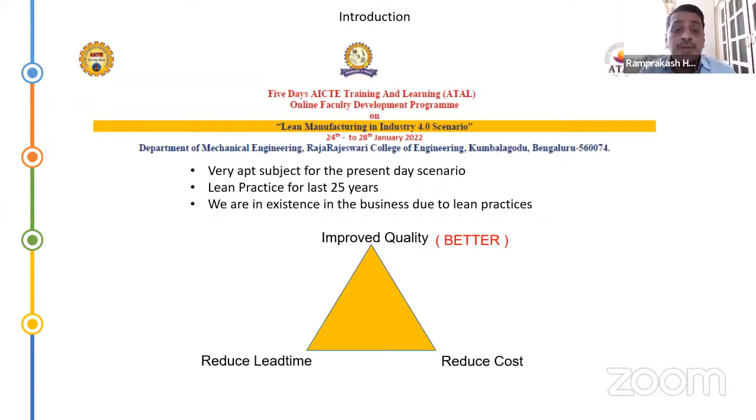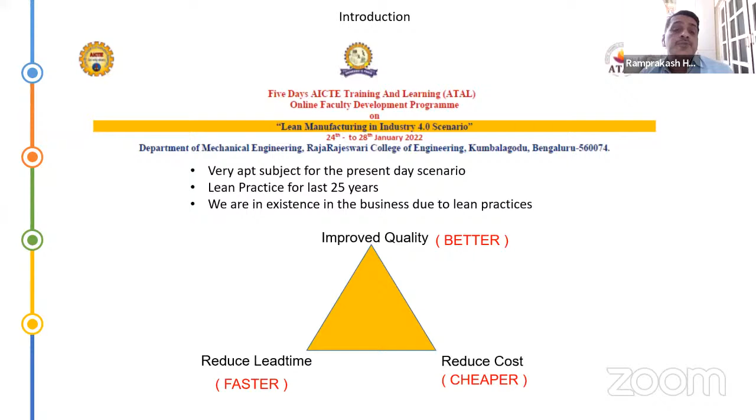So with that as the opening note, I would like to see the present day scenario. Now the customers are very demanding. They want improved quality, they want reduced cost, and they want it at a much faster rate, at a very reduced lead time. So everybody wants better, everybody wants cheaper, and everybody wants faster. So better, faster, and cheaper is the mantra. This is what is required by the industry. So that's where these concepts came into picture.

So lean originated from a tussle between Ford and the Japanese. Ford said that I can give you comfort at a higher cost, but the Japanese manufacturer said comforts at the same cost. That's where the lean concepts originated. Americans said that I can give either this or that, but the Japanese said we will give this plus that, the comfort as well as the cost effectivity, whereas the Western manufacturer said we will give either comfort or cost. So that was the difference, and that was possible by the lean principles when lean originated.

So we see several definitions of lean. I have listed some here. It's predominantly about eliminating the waste. It's about economic and time efficient use of factors of production. Lean is a permanent struggle to flow value to the customer. The core idea of lean is to maximize customer value by minimizing the waste. These are the different definitions of lean we come across in our textbooks or Wikipedia or Google or

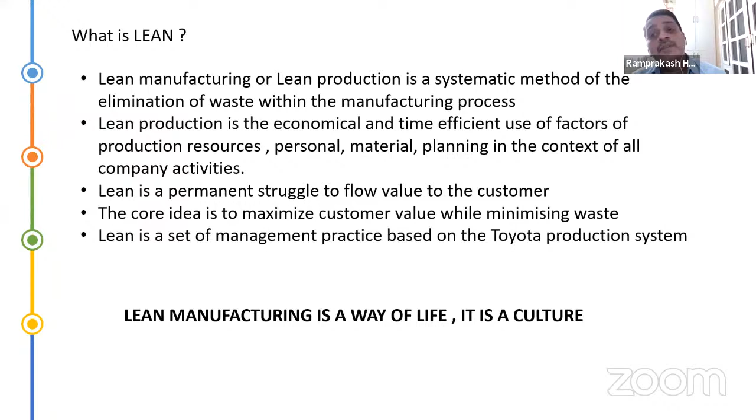So it cannot be confined to one production system. It cannot be confined to one set of people. It cannot be confined to some set of books. It is a way of life. It is a culture to be followed by the industry across the supply chain. Only then it becomes effective, only then it becomes profitable, and the real benefits of lean can be reaped. Okay, having said what lean is, now we will talk about what is Industry 4.0.

So Industry 4.0, of course, this is something you would have seen in the past 4 or 5 days by many other speakers. But this particular representation is derived by me out of my own intuition of how this would have grown. So basically, the first revolution had only the mechanical systems, and it is called mechanization. And in the second revolution, electricals and electronics got embedded into the mechanical systems. Then it became electrification. So we can call the second revolution the electrification.

And the automations sat over electricals and the mechanical assemblies, and that becomes the third revolution called automation. And the fourth is on the mechanical systems and the electrical and electronic systems, the automations, above all, the IT systems, the cyber physical systems, they got embedded into all these four to make the entire system more effective, and it can be named as digitalization. So for us, the first revolution was mechanization, the second was electrification, the third is automation, and the fourth is digitalization.

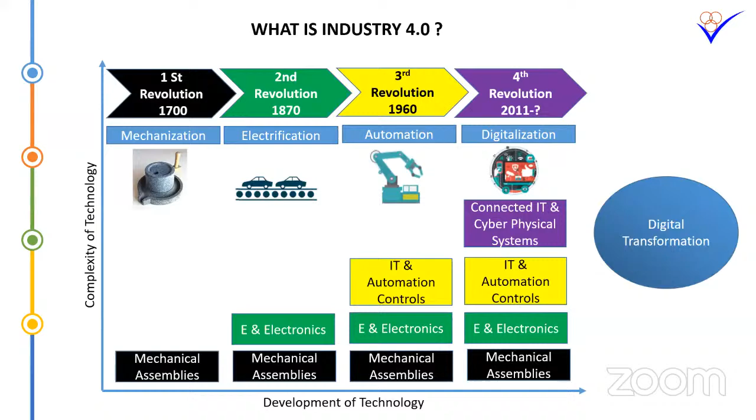So basically, there are so many techniques, so many building blocks of Industry 4.0, but I'll limit my talk only to naming them. I will not get into the details. My focus here would be to make you aware of a fundamental of Industry 4.0. That is, the fundamental nature of a matured Industry 4.0 system is my focus here. We can talk hours together, days together about each of these technologies, but that is not warranted unless we understand the fundas of Industry 4.0 and of a basic, matured Industry 4.0 situation.

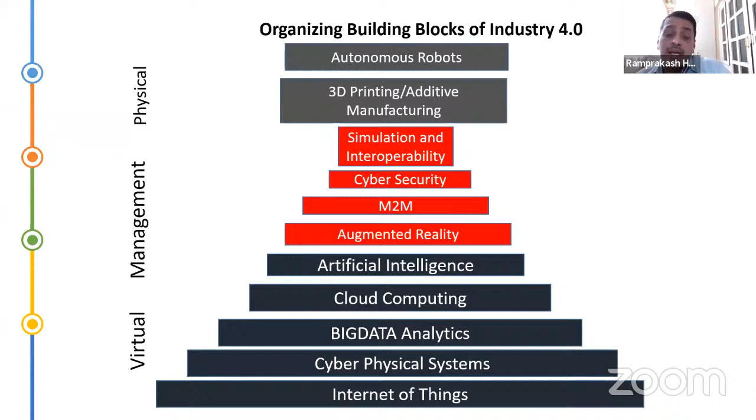These tools, some are virtual in nature, some are physical in nature, some are management in nature. So this is how they are categorized. Okay. So this is where I'm talking about the nature or the characteristic of a matured Industry 4.0 system. As I said in my opening remarks, there is a lot of confusion among the industry and academic sectors about what the ideal Industry 4.0 situation is. Anything connected to the internet, people tend to call a very good Industry 4.0 system, which may not be true.

If you connect an element of a machine with the internet, if you enable it with the internet, and start getting some information out of that equipment, it cannot be called an Internet of Things, or an Industry 4.0 situation. So basically, in an ideal Industry 4.0 situation, a system has to pass through these five steps. The first step is called the connection level. If you imagine a machine shop with CNC machines, elements of the machines have to get connected with the internet. That is the first step, called the connection layer.

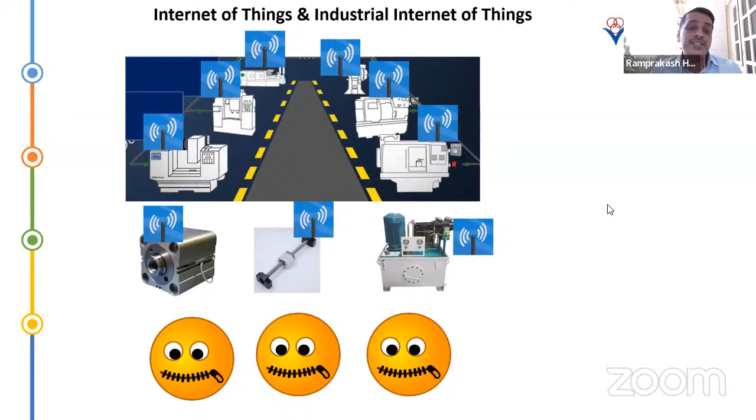Then this is what I was talking about. We have the machine shop. Then we should have a virtual layer of the machine shop. At the end of stage 2, we should have a virtual layer completely filled with data, whether wanted or not. The system will collect a lot of data, because we have empowered the elements of the machines to collect it. That is nothing but big data.

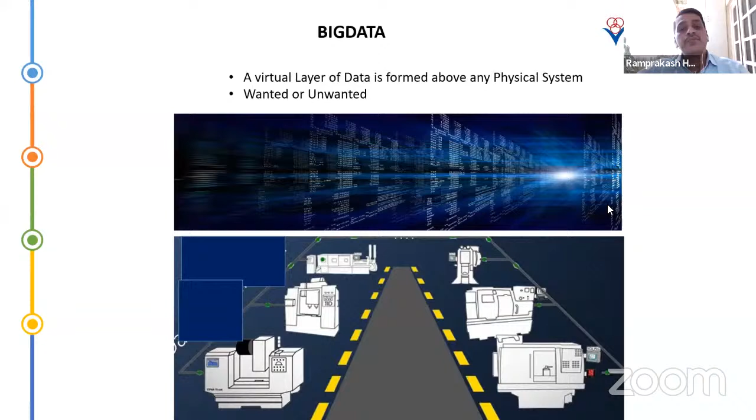It collects in a very interesting way. Every second, multiple data are collected about its performance, idle time, rejection, so many things. It keeps collecting and creates a virtual print. That virtual print will have complete data. With this data, we should be able to visualize how the factory is running. That's the purpose. So that's the second stage. It is nothing but big data.

Then comes analytics. In analytics, it will do the comparisons, and decision trees are derived based on these analytics. Very beautiful tools are available for data analytics. When it comes to manufacturing, many of you will be aware there are various sections: production, rejection, process consistency, gauge capability, machine capability, power consumption, maintenance, MTBF, MTTR, and all that. So every area of manufacturing can be brought under Industry 4.0.

We have to enable every activity to be captured by the sensors. Currently, I'm sure people are doing all these by manual methods, writing on the production books, writing on the rejection papers, and the gauge capabilities recorded in some Excels and stuff like that. The maintenances are all manual and people driven. Most of us do breakdown maintenance. There is nothing, people don't follow preventive maintenance methods and things like that.

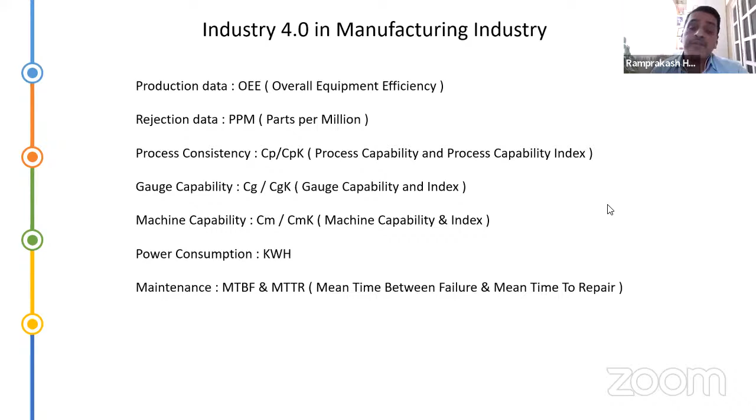Then the analytics, it is far more guided in case of manufacturing, because the principles are already derived. The CPCPKs are well established, OEEs are well established in the industry, PPM, everybody knows about PPM. So basically, whatever is derived over years has to be strengthened by data collection electronically and evaluation electronically, and the actions in the autonomous mode. That is what is the requirement or the hope that is there from the industry 4.0 scenario.

So let me just take you through one simple example of a matured industry 4.0 situation which we have implemented in our manufacturing setup. Let's imagine, I hope everybody is familiar with a turning process, component machining by using a CNC turning machine. So let's say we have to turn a component. It has a particular dimension to be achieved after machining.

So when we do this, after the machining is over, the part has to be measured either by a gauge or by an instrument. So that is done by a person, an operator who will check this, and there are reading errors. So if any error is there, then a person's involvement is there. Then the next stage is that he has to calculate whether the measured reading is above the tolerance limit or below the tolerance limit or in the mean limit.

So if at all it is above the tolerance limit, he has to do a correction. So this mental calculation he has to do, whether to give 5 micron offset or 10 micron offset or 20 micron offset, depending on the offset he has to do. Then there is again a manual operator involvement. Then comes the correction. We have to typically give an offset correction for the CNC machine, depending on the size we achieved. Suppose it is less, we have to add say 5 microns, 8 microns in the offset value, and then the next component will come within the tolerance limit. So feeding this error, offset correction, is again done by the operator or a programmer.

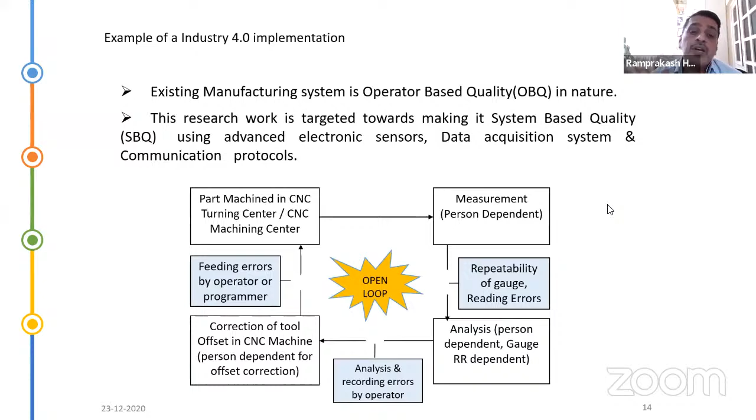Now, so what we have done is we have made an auto gauging station, auto measurement station, which will measure the component automatically. Yes, of course, the component has to be placed on the gauge by a person, or if it is a robotic system, the robotic system can place it onto the gauging station. Once it is done, then the auto analysis happens, because the data is read by the system, it is not by a person.

So the calculation is done by our cognitive system, the device, which will compare the upper and the lower reading, and then it will do an auto correction. It will estimate the reading, how much offset has to be given. Then automatically, if it is tending to go out of the specified limits, it will do the correction by itself. So it is closed looping, and you don't see any manual intervention.

Okay, so this is called closed loop system based quality. The earlier one you saw was operator based quality, and here what you see is system based quality. It is all about closed looping. Industry 4.0 talks only about closed looping. There cannot be anything which is open loop, that is the concept.

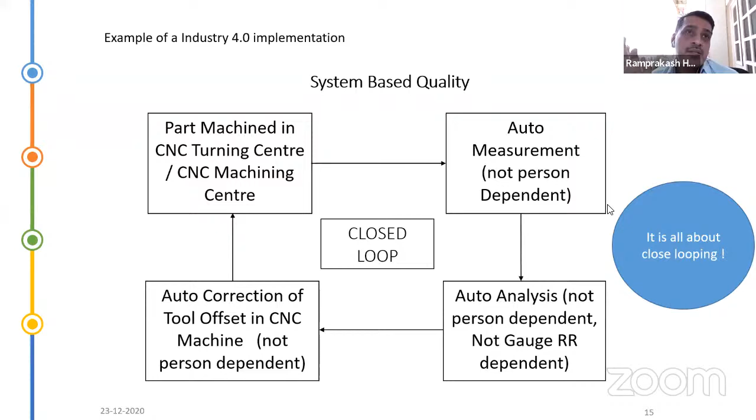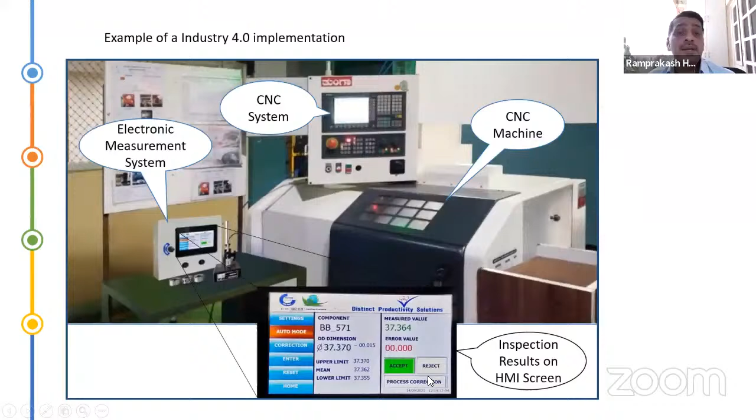So this is just the photograph of the system. There's a CNC machine, there is an electronic gauge, there are inspection results which are displayed onto this HMI screen. So this is an auto correction mechanism. This is what actually happens here.

Suppose my tolerance is 37.37 to whatever this range, so for each reading, this is the upper limit. The yellow lines you see are the upper and lower limits, lower control limit and upper control limit, and green is the mean. So the machine shop's objective is to produce the component at the mean value all the time.

But as a law of nature, it is not possible. There are no two identical parts. No two parts can be produced identically. So it tends to produce different dimensions, but within the same tolerance.

Now the system is able to calculate each and every component and see whether it is able to be self-aware. It is becoming self-aware of its own performance, which is what I was telling, the stage 2 in the industry 4.0 scenario.

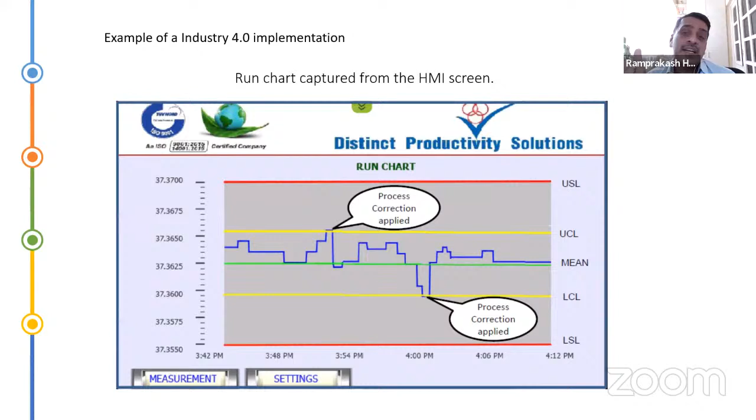So where it is able to understand that yes, my tolerance is going out of the yellow line, going out of the upper control limit, then the system itself triggers a process correction, and it brings it back to the mean, so that the next several components produced are within the quality, within the specified limits. So if you see this system, it's very simple, but it has a self-monitoring capability.

It has a self-aware capability, a self-comparison capability. It can decide what is good for it and what is not good for it, and it can self-configure. Everything happens without the intervention of any human being. And this is a very live system, running in our factory. We are able to reach zero defect situation on that particular parameter after implementation of this industry 4.0 situation.

Okay, now moving on to the second scenario. We have a cloud-based manufacturing system.

Here we have Andon. Andon is a very famous concept of lean, wherein it will show you whether the machines are working at any point of time or not. So green means the machine is working, red means the machine is not working. We have the dashboards, we have the analytics, and many other things which are able to monitor it live.

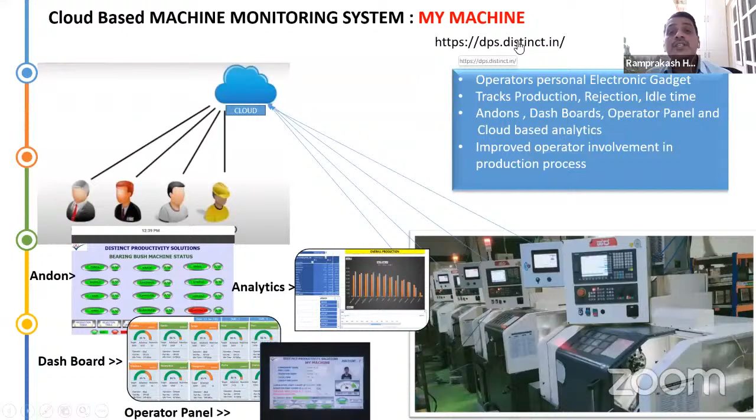Okay, so we have done a great amount of analytics here. See, you can go to the live data. I will not go to that now because of lack of time. So here, basically, I'll just touch upon a few aspects. See, here there is an analytics called demography.

Okay, so this is nothing but the machine shop's demography. These are all the different machines which are working in my factory. These are the performance till yesterday. Interestingly, we have given names to all the machines like Hara, Hari, and all these mythological names, instead of just calling them machine 1, machine 2, machine 3.

So now as a management person, when I go through this, I have 20 machines here. Out of that 20 machines, only 6-7 machines have worked within the acceptable limits. All others have not worked within the acceptable limits.

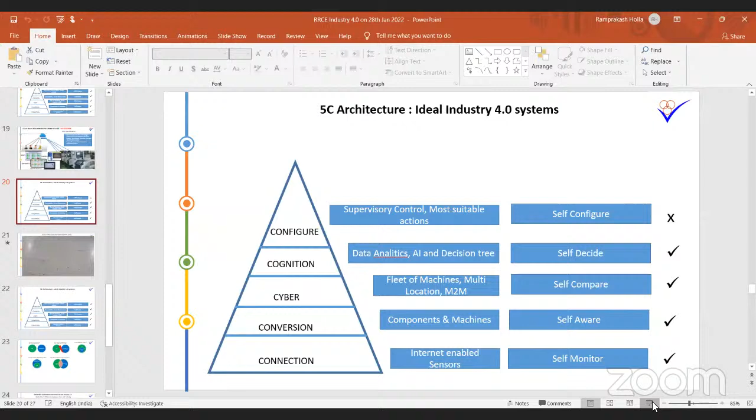Well, so now let's compare this system. Are you able to see my screen? Yes, sir. Okay, so let's compare the machine monitoring system with reference to my 5C architecture.

Okay, making some sense. So it has a connection. It is able to self-aware. It is able to self-compare. It is able to self-decide also, because it is able to show you the OEE, the rejection percentage, the idle time - everything it is able to tell.

But it is not able to self-configure. [Speaking in another language] Hello. Sir, please continue, sir. Sorry for the disturbance. Participants, please don't unmute yourselves.

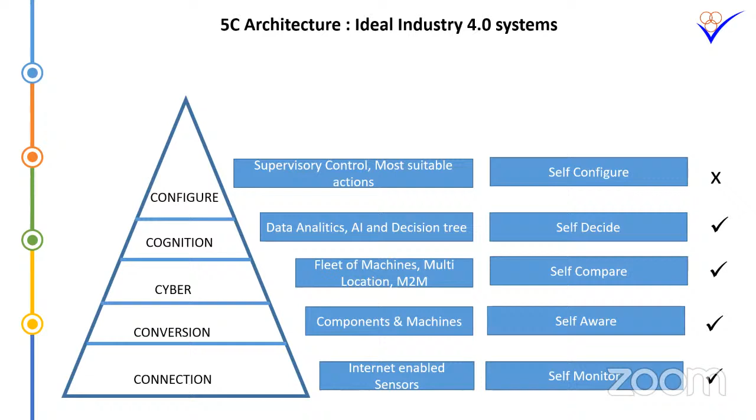So basically this is not a self-configurable system, but on a scale of 1 to 5 - 1 being connection and 5 being configuration - maybe I can rate it as 3.5. It is somewhere in the mid of the cognition layer, so it is not a very matured 5C architecture; there is a lot of scope to improve and go further.

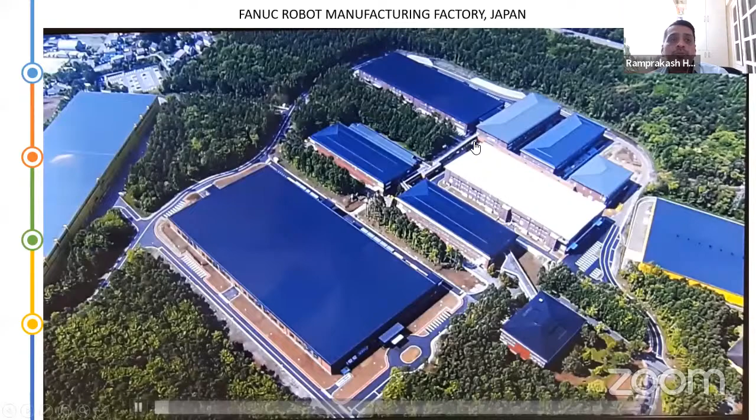So now, out of academic interest, I'll show you some video. Are you able to see the video? Yes sir, it's visible.

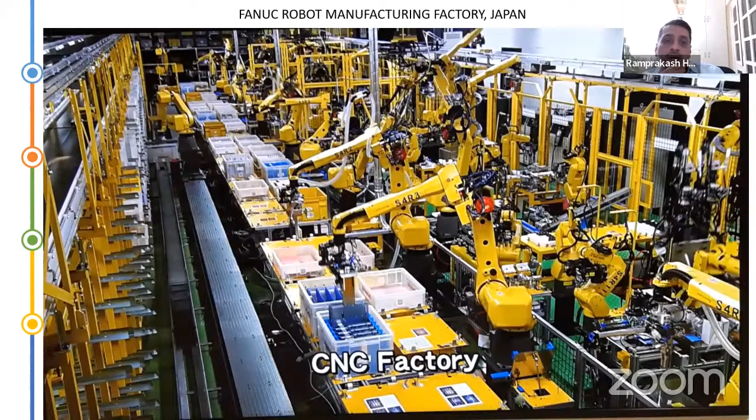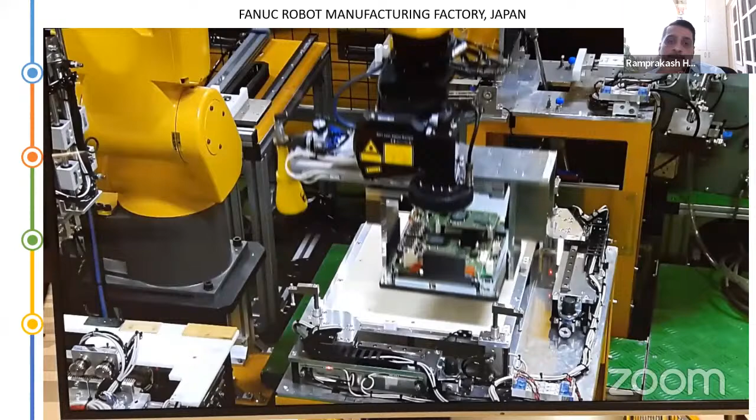So here you can see, you cannot see any human being in this factory. This is basically the Fanuc factory in Japan, which makes robots. The robots are making the robots here.

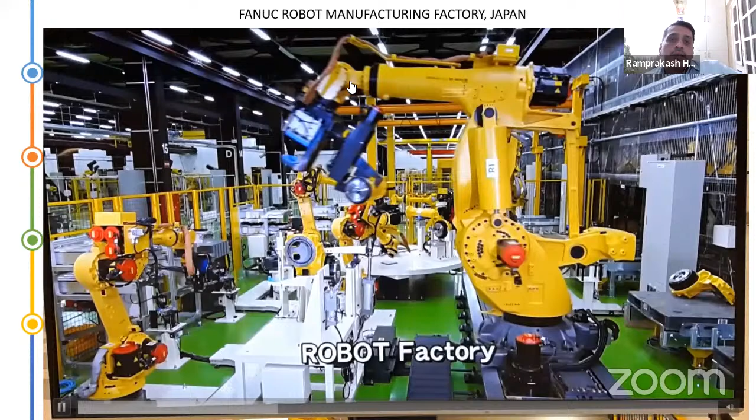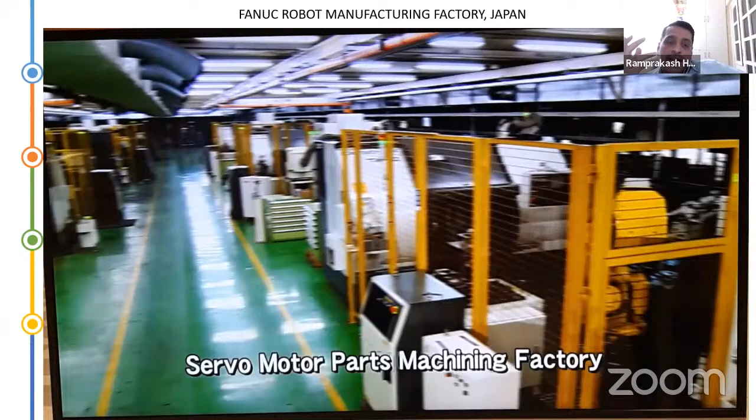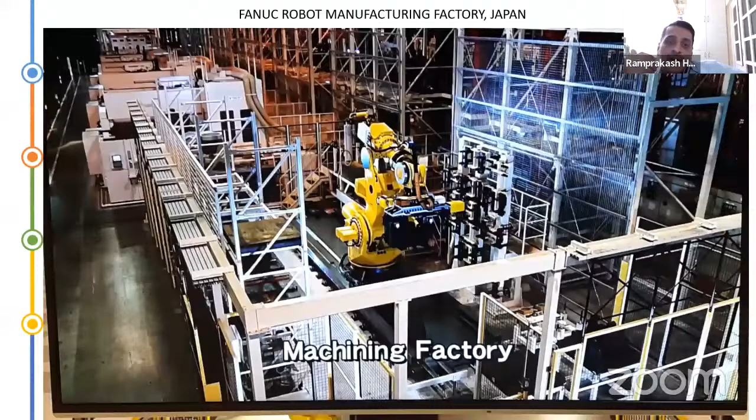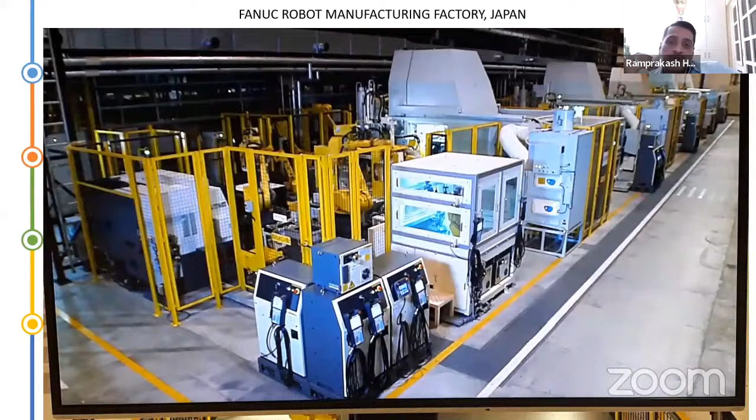What you see here is robots manufacturing robots, and you don't see any person. Imagine the amount of automation - self-aware, self-configure, self-decision systems adopted in this factory. This is a really smart factory, a very, very high-end smart factory, probably state of the art, nowhere comparable to ours. We may need another 30-40 years to reach this kind of maturity. Even painting is difficult to do by people, so these kinds of operations are all handled by robots.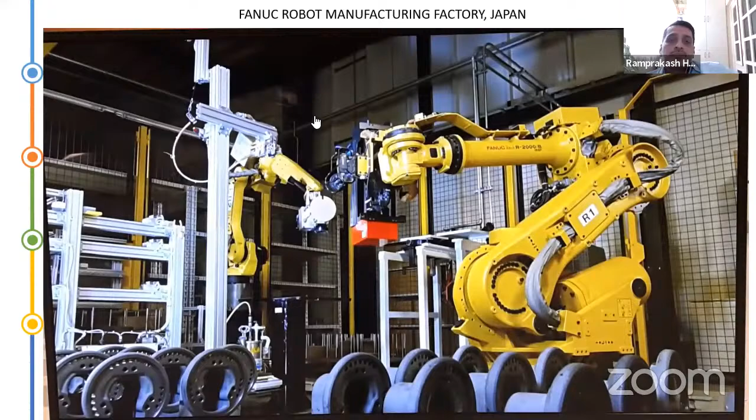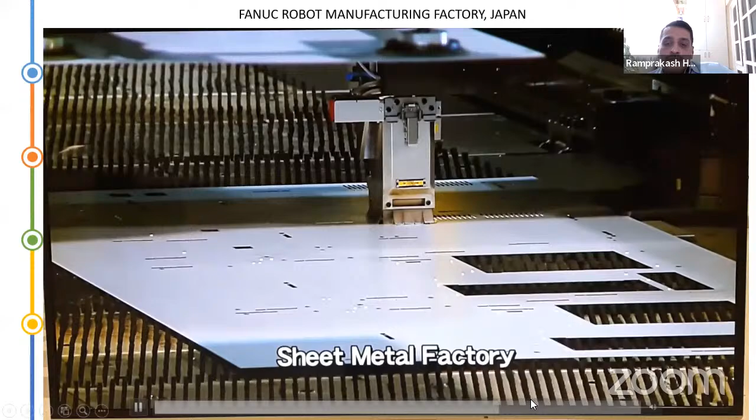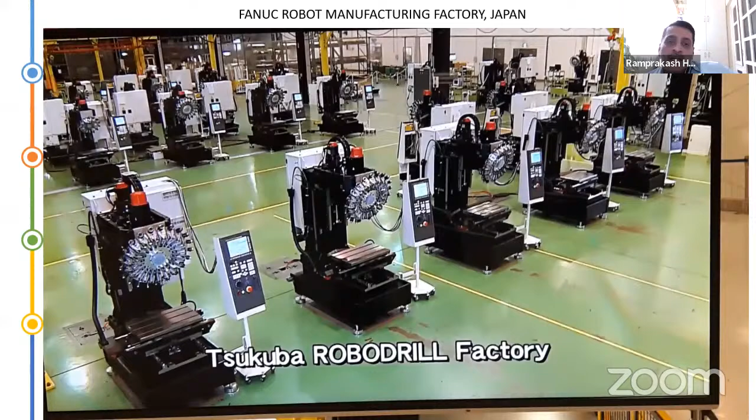The welding robots - see here, the CNC vertical machining center is being assembled by the robots.

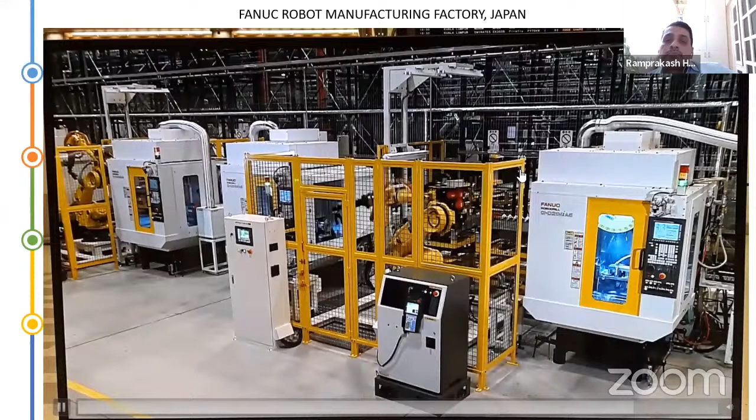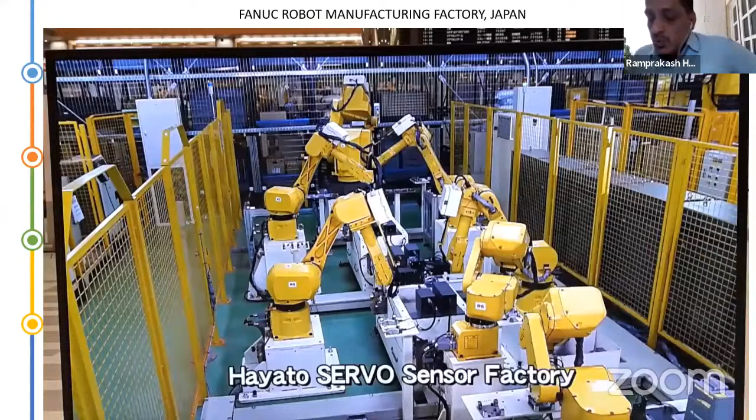Well, I'll skip this, we'll take it forward. So basically this is very, very ideal - it scores full marks in the 5C architecture because it is able to pass through all the levels of all five C's.

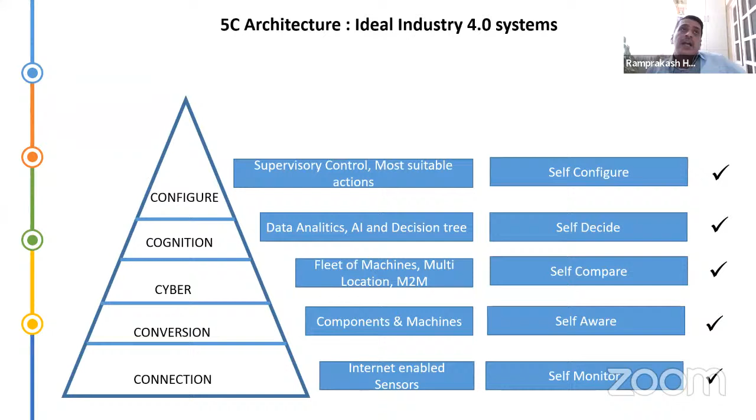Okay, now having seen these three examples, I just wanted to conclude with a few remarks. Some questions may be coming to participants after seeing the last four days' sessions - are lean and Industry 4.0 separate, or conflicting with each other? Or is Industry 4.0 a subset of lean, or is lean a subset of Industry 4.0, or is there anything common between the two? So yes, there are commonalities and there are differences.

So, lean and Industry 4.0 similarities are like both need full attention of the management, and PDCA, that is plan, do, check and act, is very, very important. So the activity cannot be outsourced. It has to be done within ourselves, within the factory. And the successful implementation of lean or Industry 4.0, both can lead to substantial benefits to the organization.

Whereas the difference is lean focuses on the people, motivation is very important, whereas Industry 4.0 focuses on the computer, automation, robots. And with lean it is often easy to fix the problems. The tools are very easy, very interesting: the Kaizens, the Kanbans, the Andons, and so on. Whereas complex hardware and software are involved, which is not easy to solve in an Industry 4.0 scenario. Lean has flexibility in changing the production system, whereas Industry 4.0 is not very flexible.

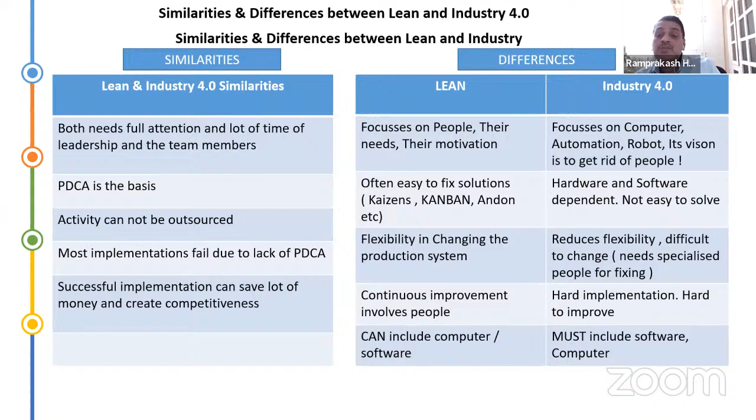And the last, lean can work without computers. It is not mandatory that a computer is required for a lean system, whereas the computer and the hardware is a must. Without that, Industry 4.0 doesn't work.

Okay. Then I'm running out of time. I'll finish in the next 2 minutes.

So the future of lean and Industry 4.0. So far the industry has seen very, very mature levels of lean implementation. It's a long journey we had as far as lean is concerned. But today we are at the crossroads because many concepts of lean are not able to close loop the systems because they are not empowered by electronic or sensing systems. So that is where Industry 4.0 comes as a complementary feature to the lean technique.

And it is going to be called Lean Industry 4.0 in the future, because lean and Industry 4.0 have to go hand in hand. They have to go together. So that is going to be the future. So the companies, the industries which are already practicing lean have to migrate, have to elevate themselves with the Industry 4.0 principles and embed them with the lean concepts to arrive at Lean Industry 4.0 to maximize the benefits. So lean alone cannot help. Industry 4.0 alone cannot help. So together they have to coexist.

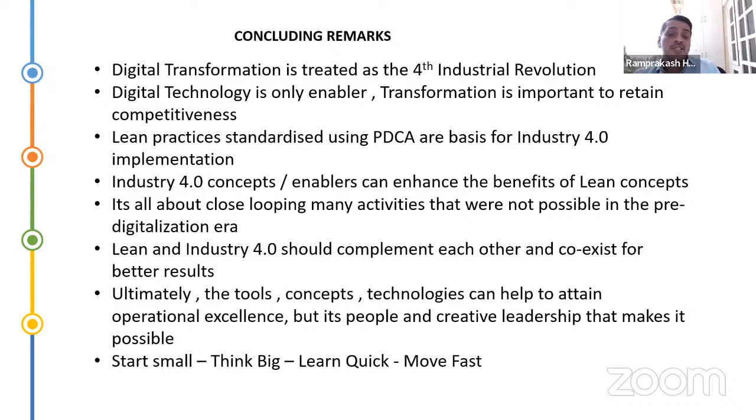Unless people see that these are the tools which are helping us to do better, we cannot say that I have implemented lean and it should give me results. No, the people behind it are very important in making it happen. And last but not least, we have to start these things small, but think very big, and we have to learn very quick, because time is going fast. The digital era is moving very fast, and we have to move fast for successful implementation.